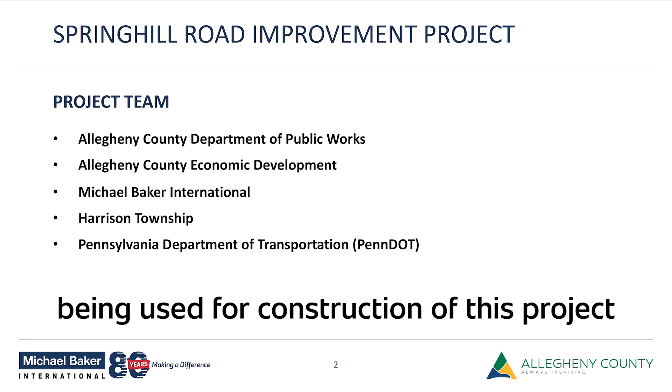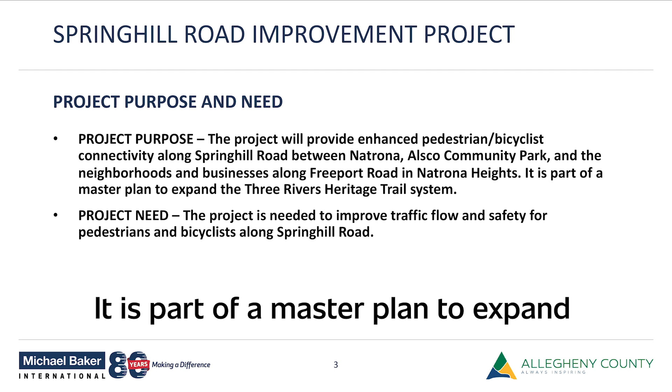The purpose of this project is to provide enhanced pedestrian and bicyclist connectivity along Springhill Road between Natrona, Alsco Community Park, and the neighborhoods and businesses along Freeport Road in Natrona Heights. It is part of a master plan to expand the Three Rivers Heritage Trail system.

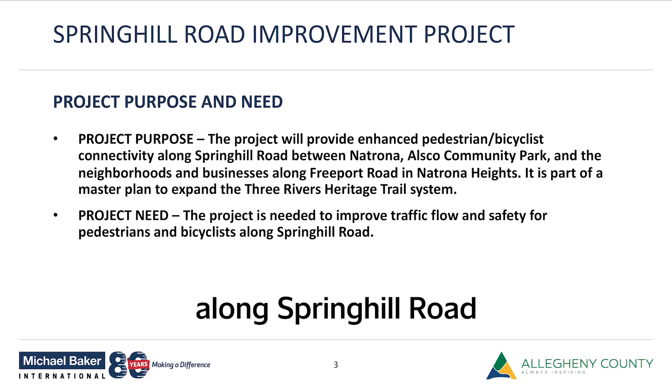The project is needed to improve traffic flow and safety for pedestrians and bicyclists along Springhill Road. The current conditions along that stretch of road require pedestrians and bicyclists to use the same space as vehicular traffic.

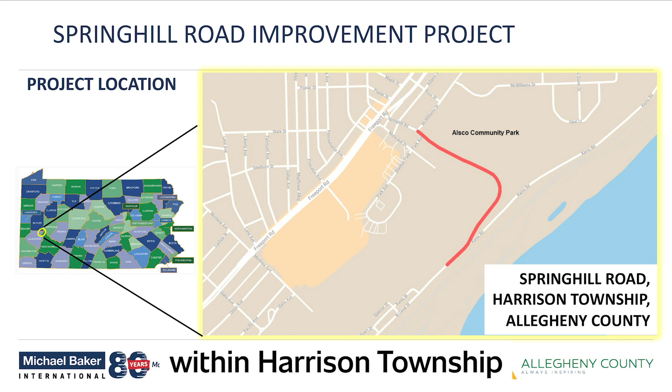The map provides an overview of the project location and its limits within Harrison Township. The project limits are McWilliams Drive to the north and North Canal Street to the south. That includes a section of Springhill Road adjacent to Alsco Community Park.

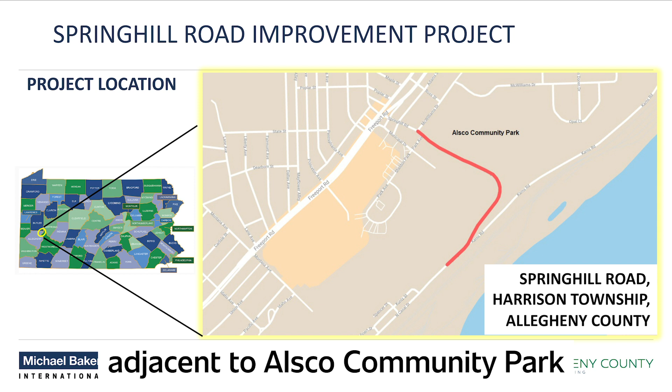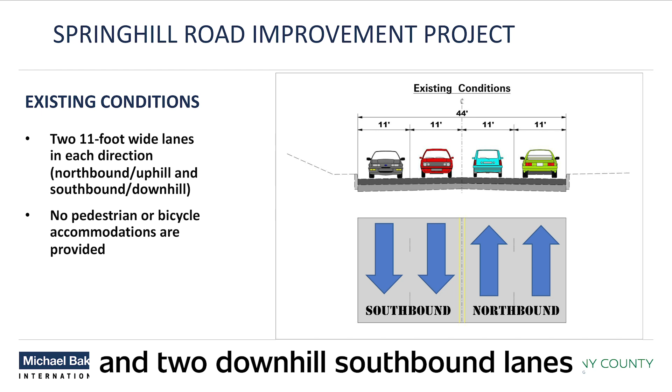The existing conditions on Springhill Road consist of 2 uphill northbound lanes and 2 downhill southbound lanes. The 4 lanes are each 11 feet wide. As previously mentioned, there are currently no accommodations other than the vehicular roadway for pedestrians and bicycles.

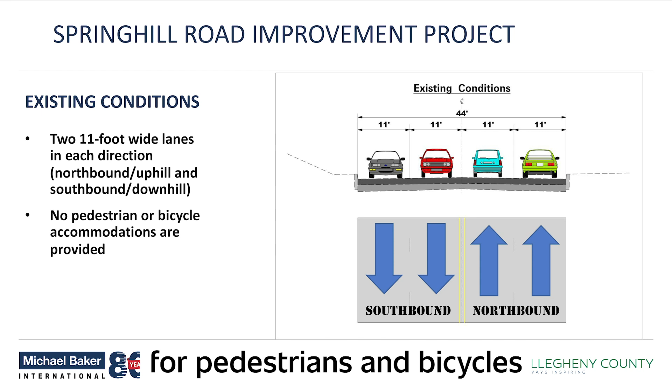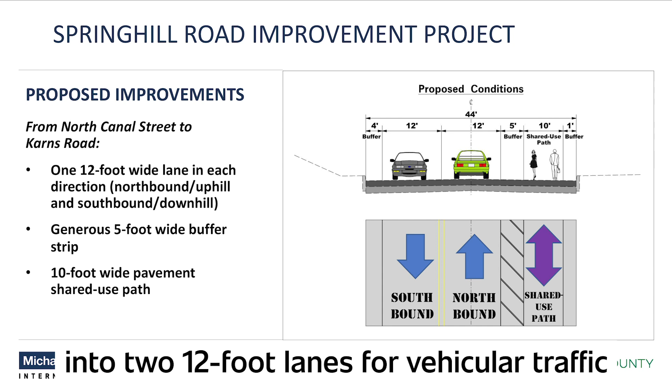The proposed improvements for Springhill Road are split up between 2 sections. One of the sections is from North Canal Street to Karns Road. In that section, the roadway will be divided into 2 12-foot lanes for vehicular traffic, one for northbound uphill traffic and one for southbound downhill traffic.

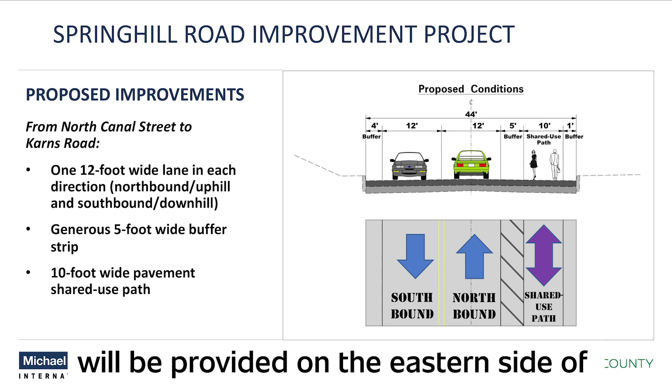In addition to these lanes, a 10-foot wide shared use path will be provided on the eastern side of the roadway, separated by a 5-foot buffer. The path and buffer will be at the same grade as the existing roadway.

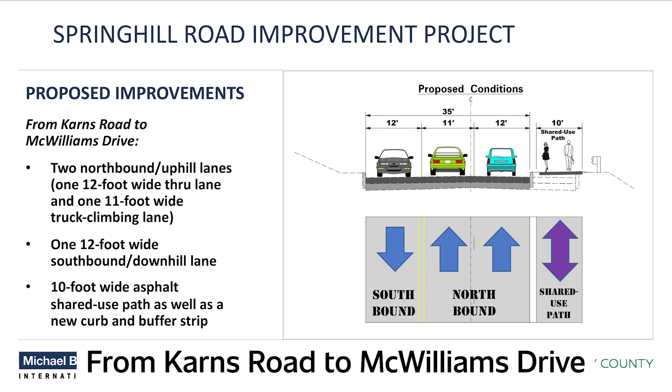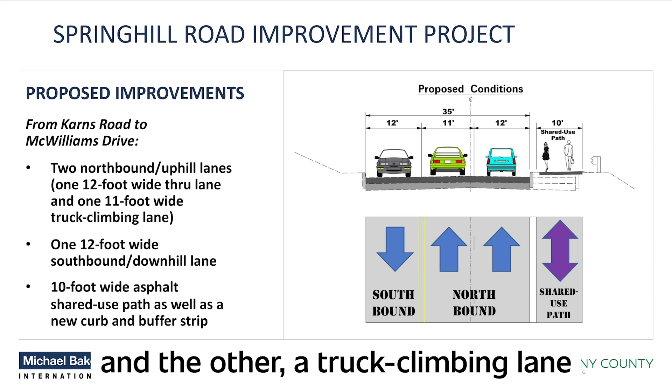From Karns Road to McWilliams Drive, the roadway will be separated into 2 lanes for northbound uphill traffic. One of them will be 12 feet wide, and the other, a truck climbing lane, will be 11 feet wide. There will also be one 12-foot lane for southbound downhill traffic.

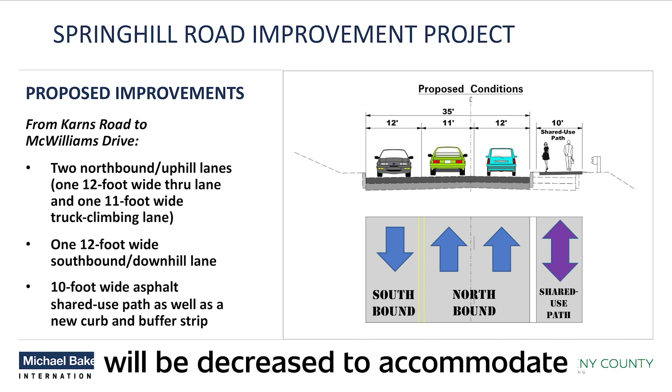The width of the existing roadway will be decreased to accommodate for an elevated shared use path that will be separated by a small buffer and full-height concrete curb. The shared use path will be a 10-foot wide asphalt strip.

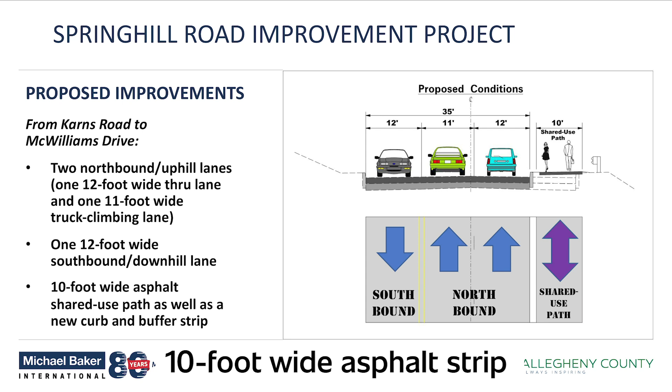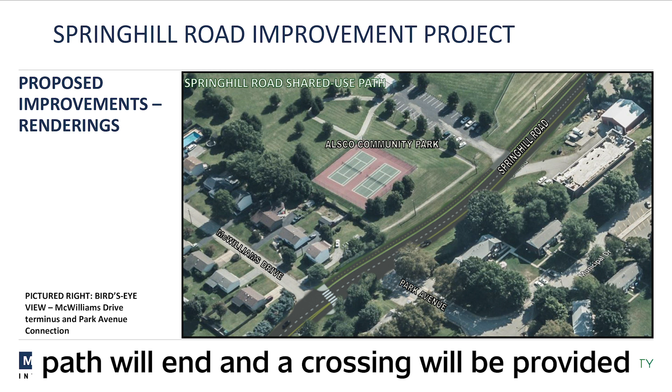This is an overview of the northern limits of the project at McWilliams Drive. That's where the shared use elevated path will end, and a crossing will be provided at McWilliams Drive to enable pedestrians and bicyclists to access Park Avenue and eventually destinations on Freeport Road.

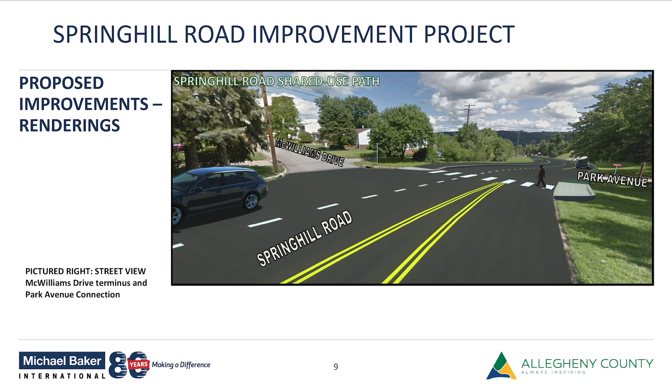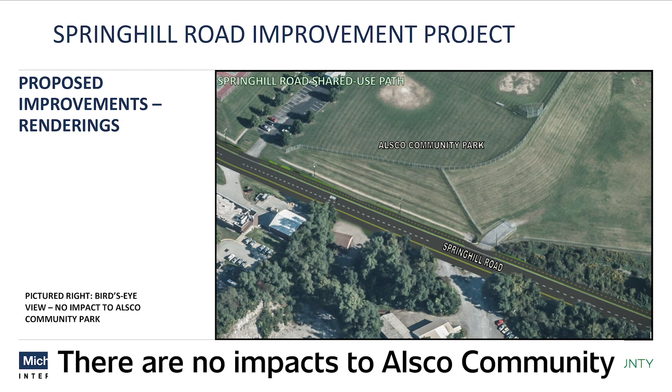This is where the shared use path will be elevated and separated from the roadway by a concrete curb. There are no impacts to Alsco Community Park proposed as part of this project.

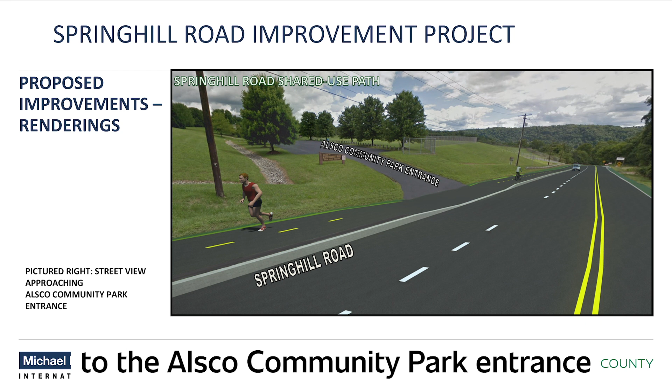This is a street level view of that same location. You can see the shared use path in relation to the Alsco Community Park entrance, which will have a depressed curb. Also, the shared use path will be adjusted to accommodate vehicles turning in and out of the park entrance.

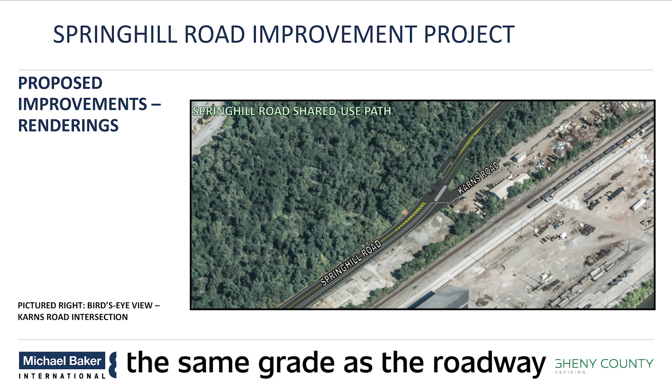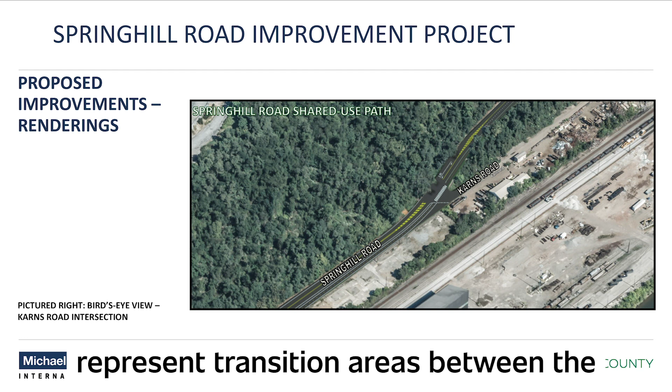This is an overview of Springhill Road where it meets Karns Road near the southern limit of the project. At the intersection, the elevated shared use path transitions to the same grade as the roadway and becomes separated from vehicular traffic by a wider 5-foot buffer. The hatched yellow pavement markings represent transition areas between the 3-lane and 2-lane vehicular sections on Springhill Road.

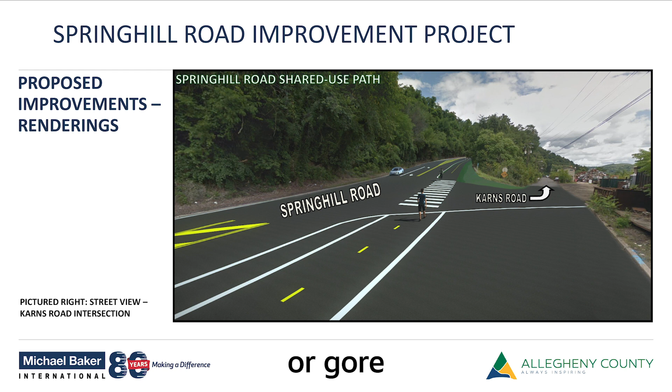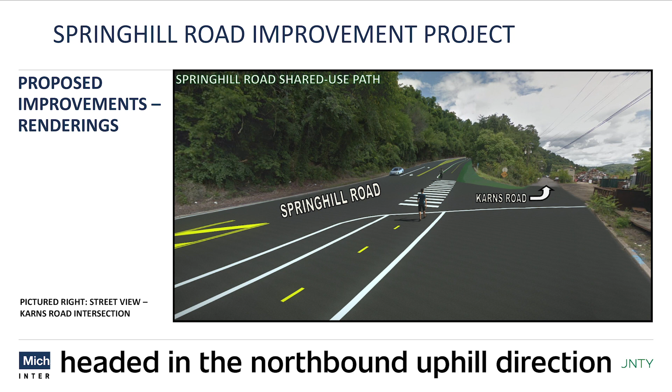This is a street-level view of that same location. Beyond the hatched yellow pavement markings or gore, on the northern side of the picture, that's where the space for the southbound left turn lane will transition to a second vehicular travel lane headed in the northbound uphill direction. And as you can see, the shared use path includes a marked crosswalk at Karns Road.

To summarize, the Springhill Road Improvement Project includes a marked crosswalk at McWilliams Drive across Springhill Road, which will connect to Park Avenue and the existing sidewalk network and eventually lead to destinations on Freeport Road. Included in this project is the installation of a left turn lane on Springhill Road in the southbound downhill direction at Karns Road, and a marked crosswalk across Karns Road where it intersects with Springhill Road.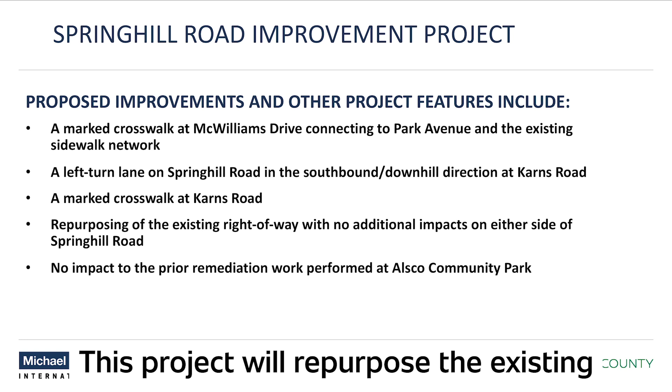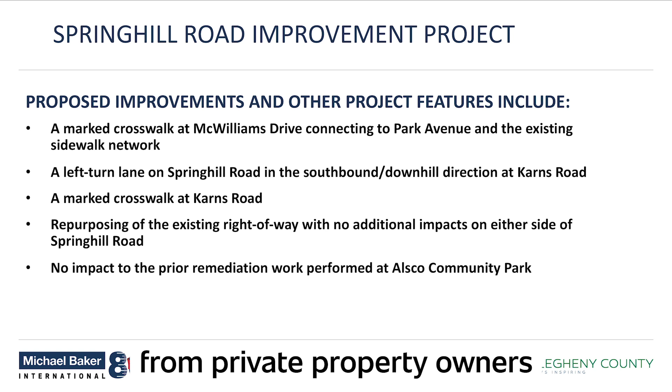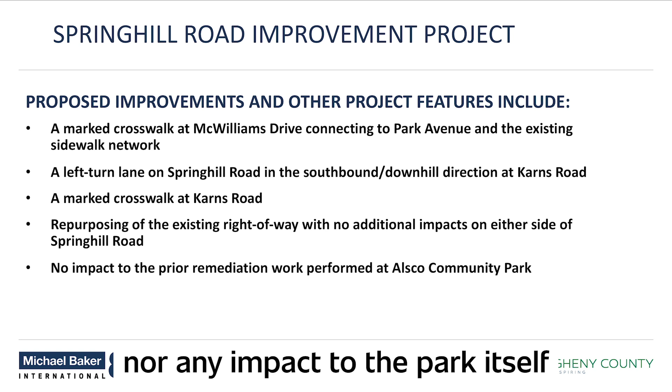This project will also repurpose the existing right-of-way with no additional impacts on either side of Springhill Road. Also, no right-of-way will need to be acquired from private property owners to construct these improvements. Finally, there will be no impact to the prior remediation work performed at Alsco Community Park, nor any impacts to the park itself. Construction during this project will not necessitate a complete closure of Springhill Road or require any detours.

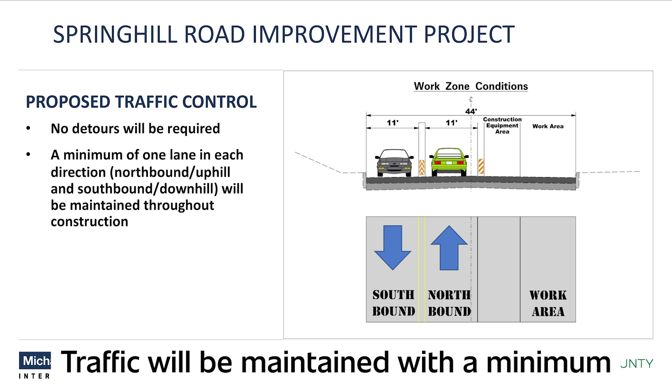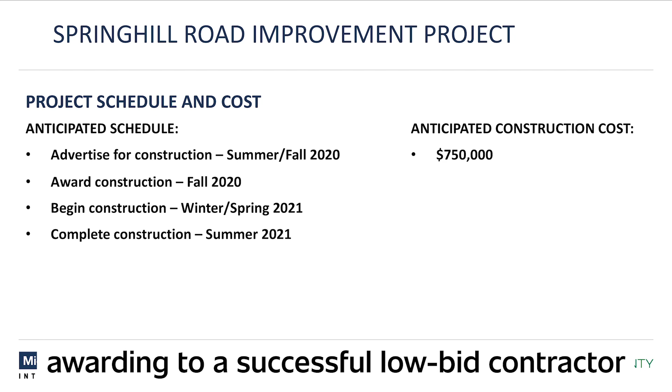Traffic will be maintained throughout the project with a minimum of 1 lane in each direction, northbound and southbound. As of now, we anticipate advertising for construction in September of this year and awarding to a successful low-bid contractor in November of this year.

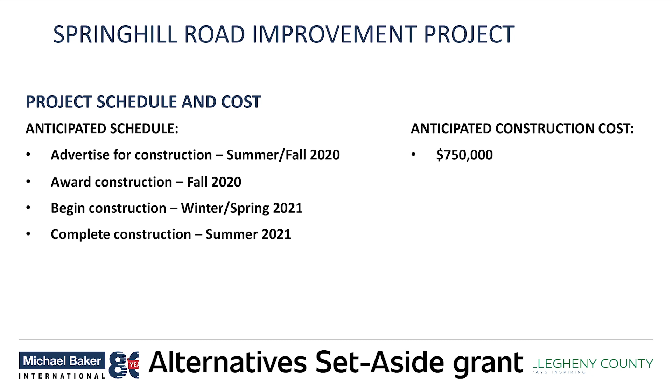We then expect construction to begin in February of next year, which we hope to complete by July or August of next year. The anticipated construction cost of the project is $750,000. It is being funded via a Transportation Alternatives Set-Aside grant awarded by the Southwestern Pennsylvania Commission, or SPC, and as previously mentioned, PennDOT is providing oversight of those funds.